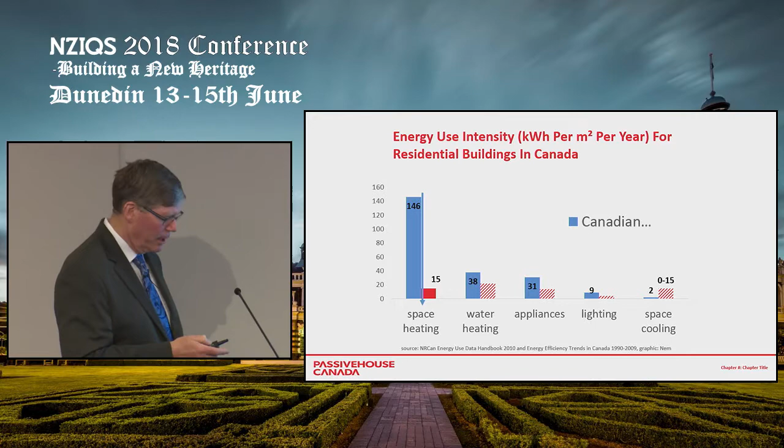Now, a few other characteristics. If we've got a true high-performance building, we can use that as a foundation for other standards. If the building itself is high performance, the renewables become much more affordable. They become viable on a grid scale if we've got the energy loads for the building down enough. The whole picture then makes sense, so that it becomes an affordable path to net zero.

If you wish to make choices on materials, that's a really simple thing to do. The hard part is getting the overall energy loads down. The easy part is swapping out materials. So that's pretty easy to do.

And if we're looking for multiple benefits, as I mentioned with the UN initiatives and so on, these buildings will provide that inherently. If you look after those energy flows, the multiple benefits of health and comfort come largely because the building is insulated or isolated from the external environment. You've got this envelope that can protect the inside.

The other point that's really critical, particularly in cities like New York. New York got hit by Hurricane Sandy, and ever since then they've really been pushing the game, and they're a real center of passive house buildings and scaling up the buildings that they do there. But a big driver for them was resiliency. When the Hurricane Sandy hit, people were without power for a long period of time. They want buildings that can remain habitable when the power is out.

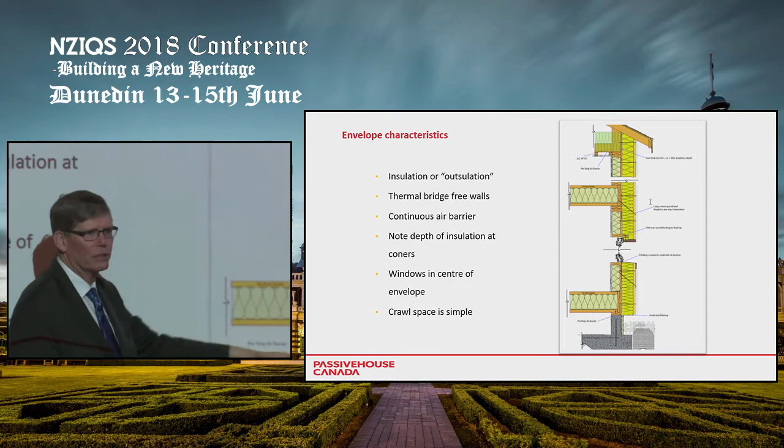And the blanket goes all the way around. So you can see on this drawing, we've got insulation that's a good thick layer right around the eave up there in the top corner, goes all the way down and under the floor. This is just a crawl space under here. So these corners are all well insulated.

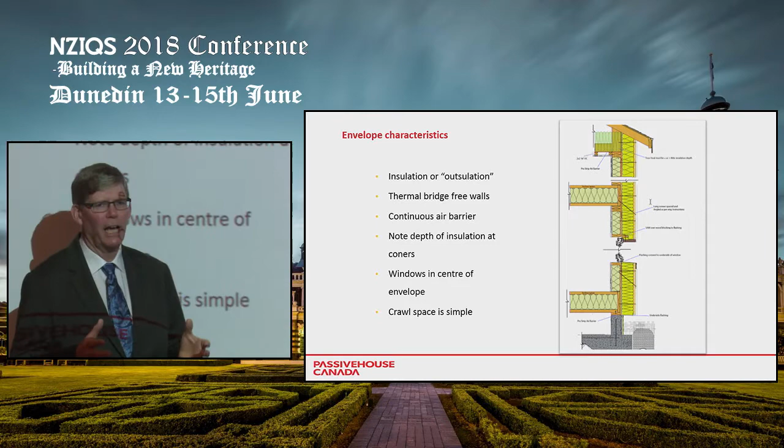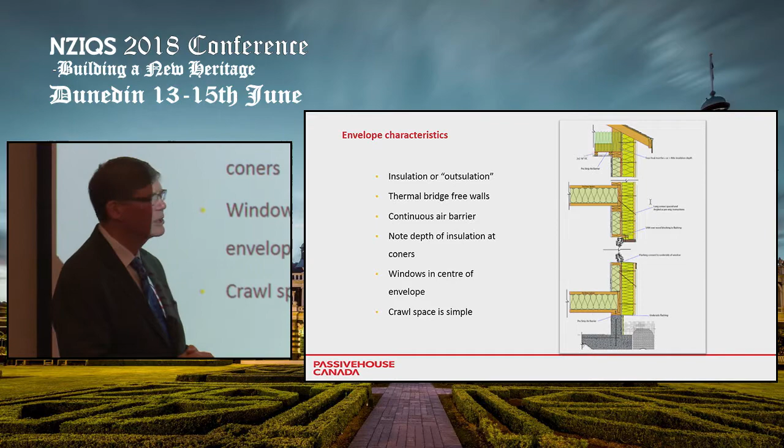And the window is mounted near the center of the thermal envelope. It makes a huge difference how the window is mounted in terms of the performance and the ability to keep the cold out and the warm in. So it's these sorts of basic design features and keeping it simple.

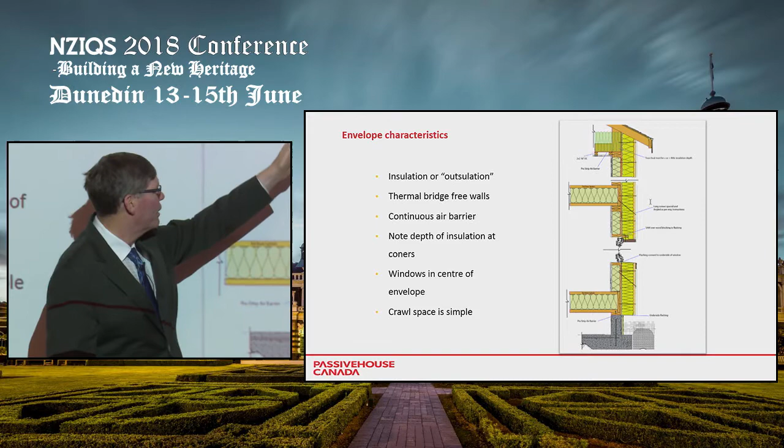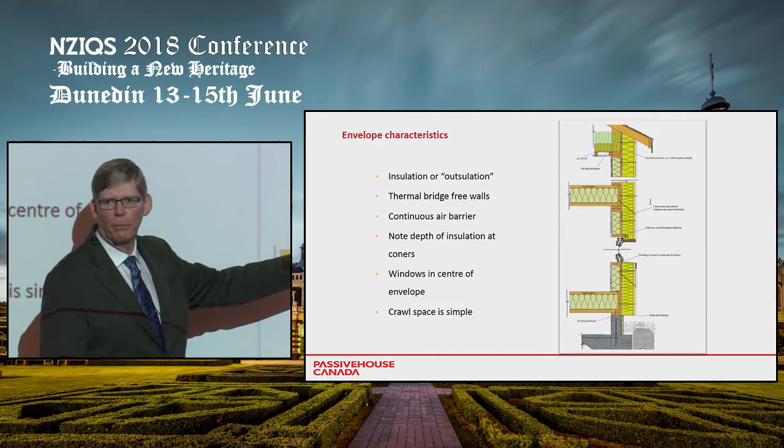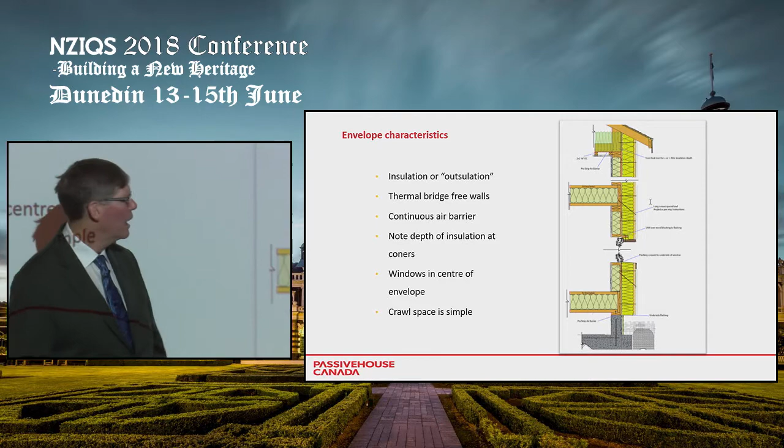So if you want your air barrier to make it airtight, a good place depends on - you do the dew point calculation, other things, your envelope consultant will figure all this out depending on the climate where you're building. But in our climate, we typically would pick a surface. If this is a structural wall, it's just a really simple platform frame structure, in this case a wood frame building. Then we would put the air barrier here where we can make it nice and continuous, and it's out of the way of the trades when they come into here and start drilling holes for electrical and plumbing. And then you've got this robust air barrier that's continuous, it's safe, it's protected, and then you put the insulation over that, and then build your rain screen outside of that.

So that's sort of a nutshell of how an envelope may look. It wouldn't matter if it were built out of concrete, steel, or wood timber, big massive timbers. The same sort of principles apply.

You want this continuous layer of insulation, a really robust airtightness layer, and check to make sure you've minimized thermal bridging. If you've got a concrete building that goes down to a parkade, and elevators that go down to the parkade, that sort of thing, then you're going to have some good head scratching to do, figuring out how to get elevator shafts and other things airtight and thermal bridge free. But there's products available, thermally broken products where you can minimize the thermal bridge impacts, and in some cases you just suck it up, you've got some thermal bridging, and that's the way it is. But these are all design things that get looked at when the building is only on paper.

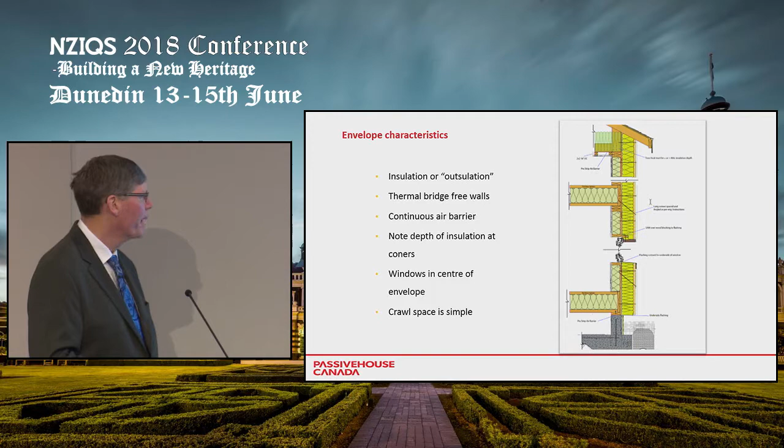Here's a drawing and a photograph of the item in place. It's just another example. Again, it's a small, simple wood frame building. But there, it's a little different wall structure than was shown on the other.

This is balloon framing. Does that mean anything? Is that a term that's used here? Not hearing it. Okay, balloon framing is a wall - the wall structure goes all the way up, and the floors are bolted onto that structure. So with platform framing, you've got one floor coming up here, and one wall coming up like this. You drop the floor on it, and then the next section of wall gets put on top of the floor. So that's what we call platform framing. And balloon framing, you'll have the wall going all the way up, and you bolt a floor onto it.

So that's what's happening here, and you've got the deeper sort of structural timber there. What is it, 190? It's 8 inches, so 190 millimeters.

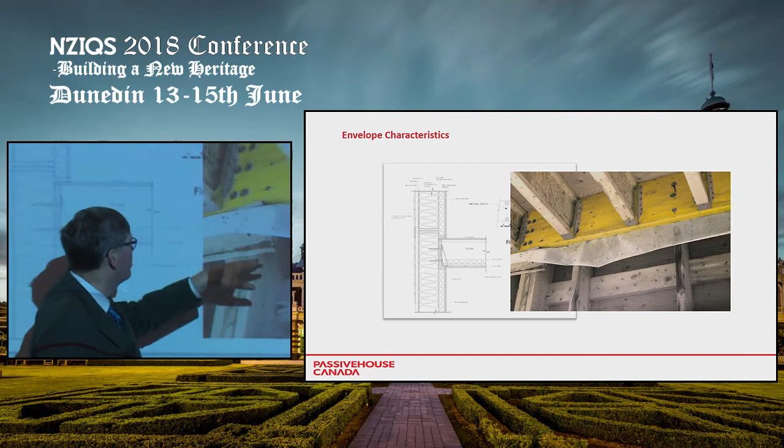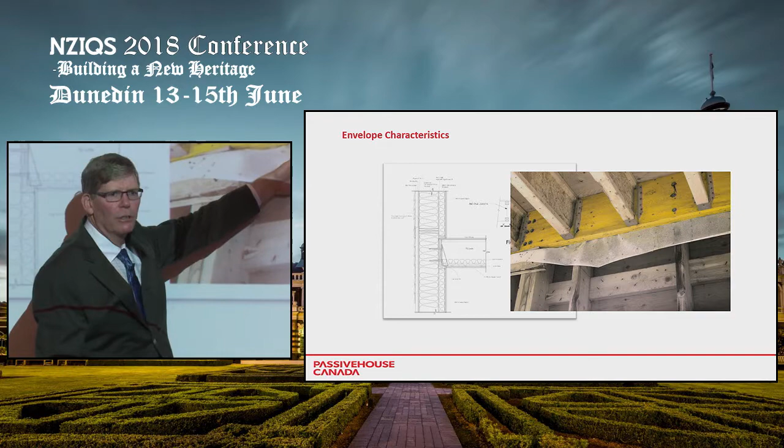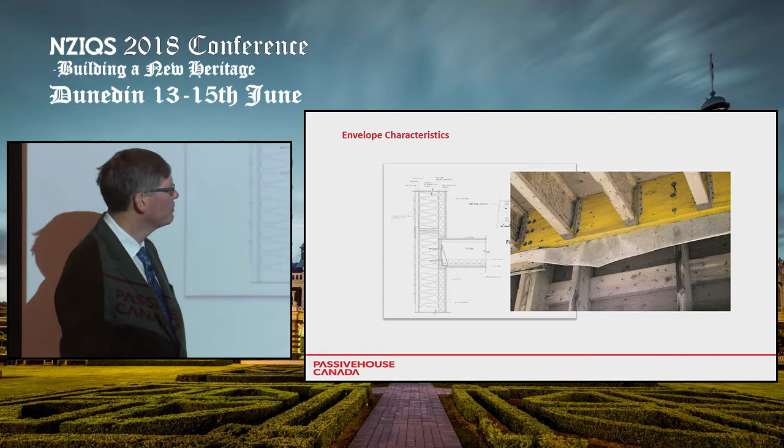And the lintel here is bolted right here. You can see it's bolted onto the structure of the wall, but behind it is this fabric. This fabric is actually the air barrier. So it is continuous up behind the lintel, and what we'll do is just join this flap here to the layer of airtightness that carries on down. And then the cavity is filled with insulation. So that air barrier is in behind things and out of harm's way. And the floor is just sitting there. And then you don't have the thermal bridging and the air leakage through the building envelope, because the insulation is outside of, most of it is outside of that lintel. So that's what that drawing shows. Does that make sense? Yeah.

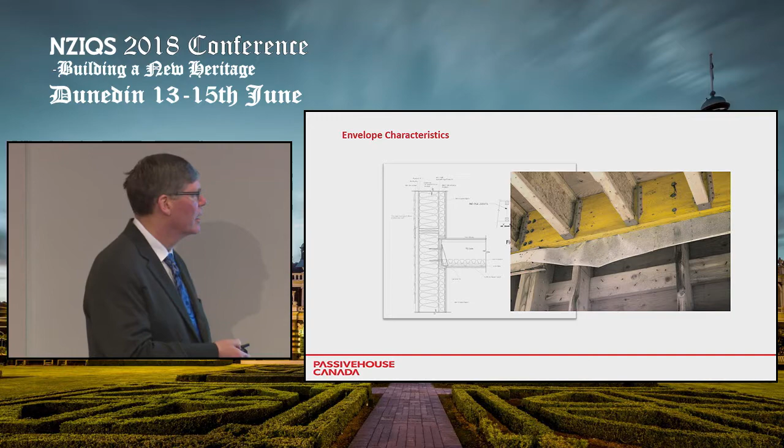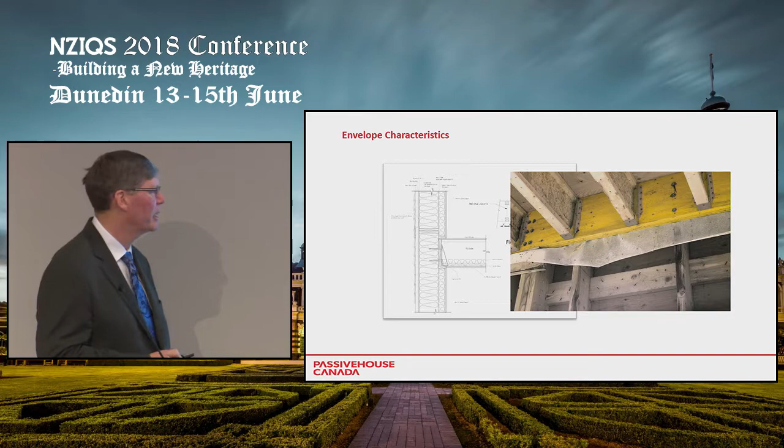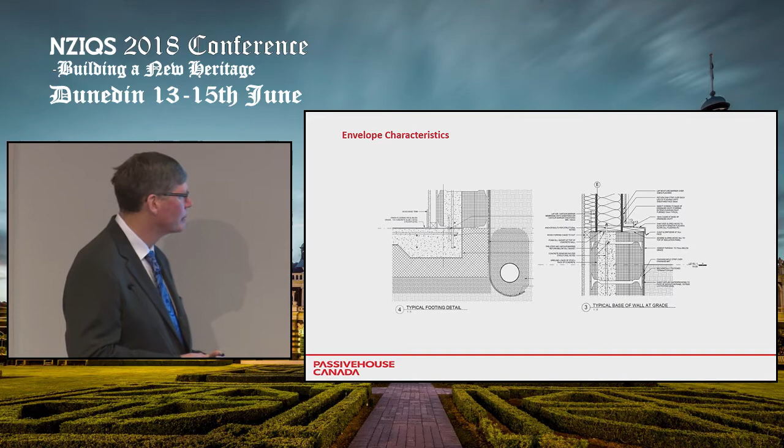And everyone will have their own way to do these things. It's just a matter of figuring out what works best in the local market and the trades you're most familiar with, the materials that are being used, that type of thing. These are just a couple of small examples that we've used. If we've got a lighter building - again, we're not talking a large building with a parkade, that sort of thing - but a lighter building with a concrete, a warm slab, so slab on grade type thing.

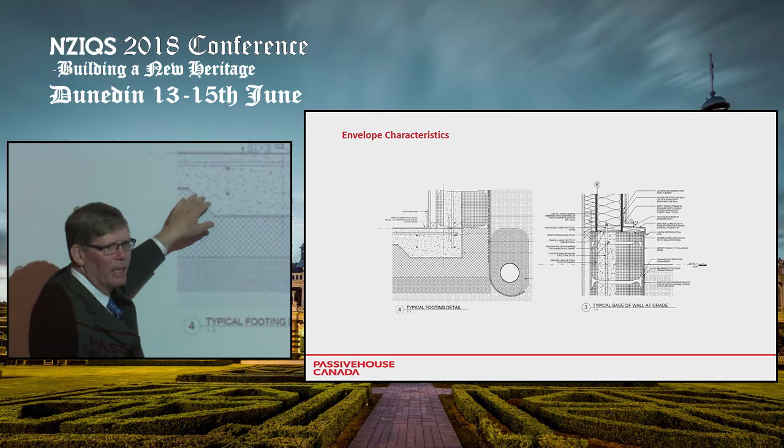What we'll have is the concrete here. Insulation is outside the wall, comes down, is continuous right under the footing, and then back up under the slab. The idea is we keep the slab warm so your feet don't need to be cold. In Canada we're always worried about cold, so that's what's happening here, and the concrete just assumes the ambient room temperature and is no longer cold.

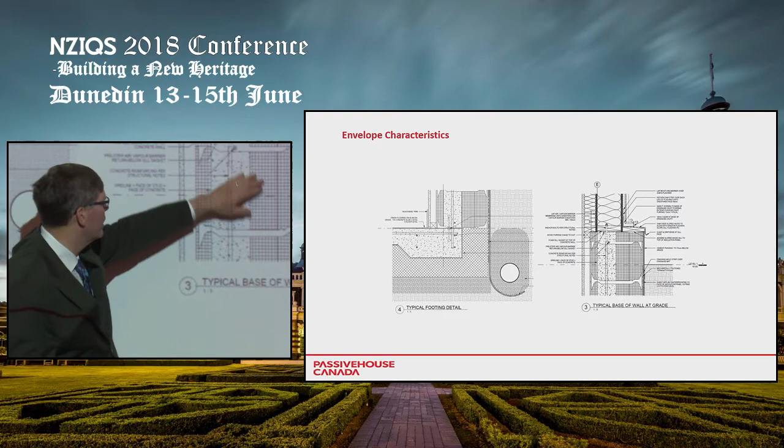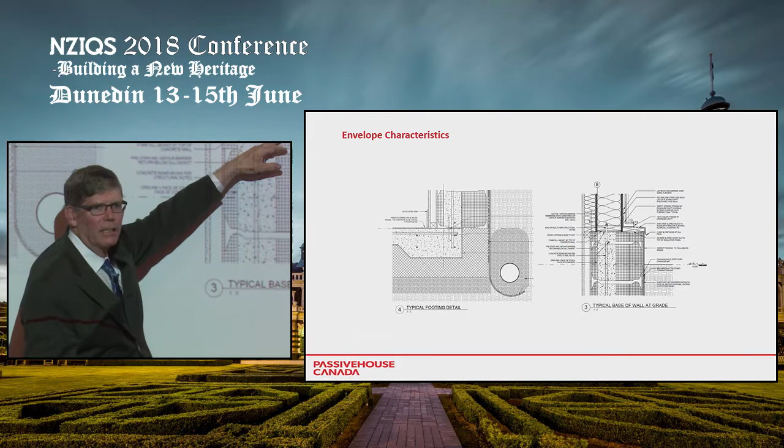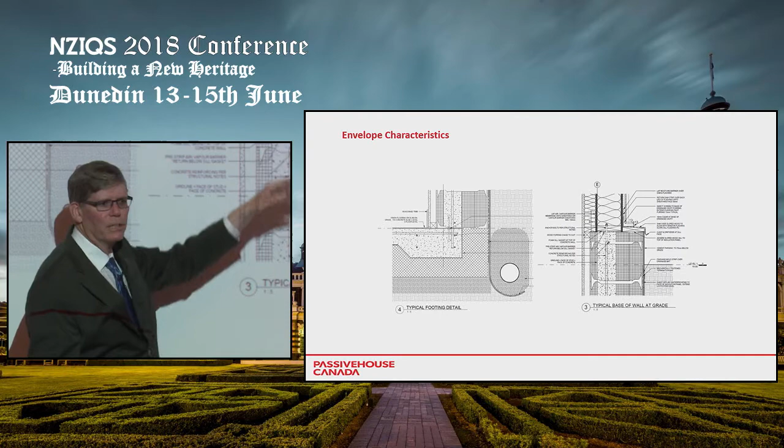And for the wall junction, you keep the insulated wall here. This is the concrete to wood junction, so the insulation is outboard, and the wall is here. There's a bit of thermal bridging here, which isn't ideal, and there are tidier ways to do it. But that's an example of trying to keep the inside surface always warm, with enough insulation to keep it warm in winter or cool in summer.

Now, this is something quantity surveyors seem to understand - the principle of keep it simple, stupid. We were doing this project, one that I did, and we wanted to put some dormers in to keep the neighbors happy, have it in the design and get our planning approval that way, make it look more traditional. We priced the truss package and thought, oh yeah, that's not bad, we can afford to do that.

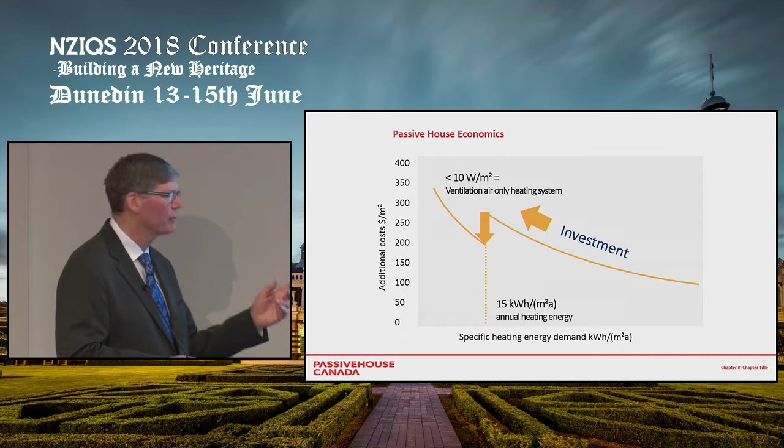And again, at this 10 watts per square meter, that is the heat carrying capacity of air that enables these simpler systems. So that's the reason for the little notch being at about that location.

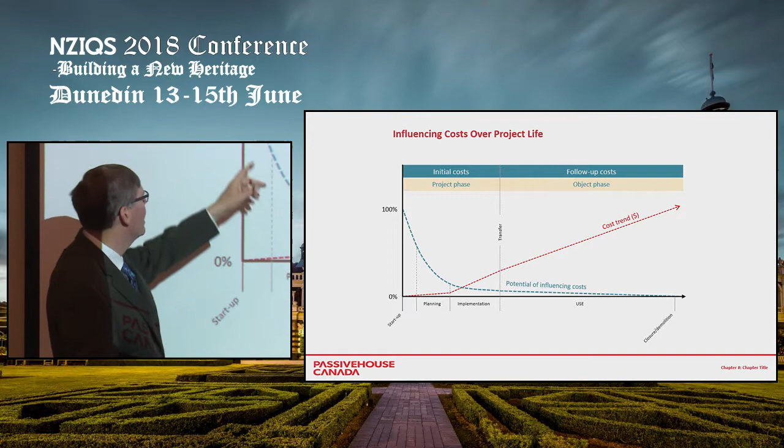By the time the building is in use, your ability to influence life cycle costs is very low. Even when you're into construction, it's minor. The time when you can really drive down costs is when you're thinking about the concept of the building, its architectural form, the general program, its concept. That's where the big savings are.

And then after that, it's declining returns. So the question is, at what point in this life cycle do the value engineers show up and go to work, and what capacity is there to really influence costs at that stage? We need the costing people involved right at the outset. And that's the integrated team approach.

A couple of examples of what happens when that integrated team approach is taken, or if the market is simply let to do this on a competitive basis, because people will figure this out when there's a competitive environment and they're chasing a pot of money.

The Pennsylvania Housing Finance Authority decided a couple of years ago that, in deciding which projects they're going to fund—they fund social housing projects all over the state of Pennsylvania—they would give an extra 10 points if it's a passive house building rather than a code minimum building. And 10 points was significant. I think they had a little over 100 points total. But it was a pretty good bump.